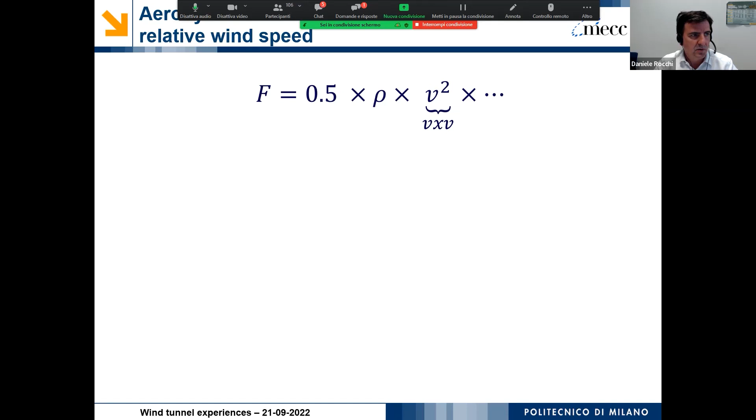This is not only something that for sure we know, but what is interesting is that the relationship between the aerodynamic forces and the relative speed is not a linear dependency. We have the dependence on the square of the relative speed. It means that if we double the wind speed, we make the aerodynamic forces four times larger.

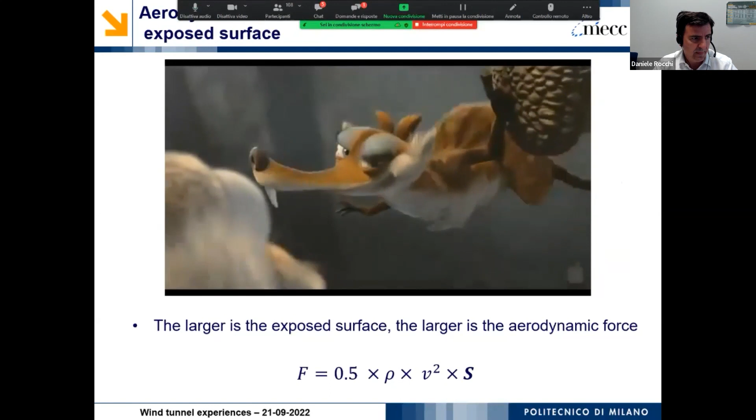Another aspect that is important to understand is that the larger the exposed surface to the wind, the larger the aerodynamic forces. So if we fix this concept, we must say that forces are linearly dependent on the surface exposed to the wind. Then there is another aspect to take into account, due to the shape of the body that is exposed to the wind.

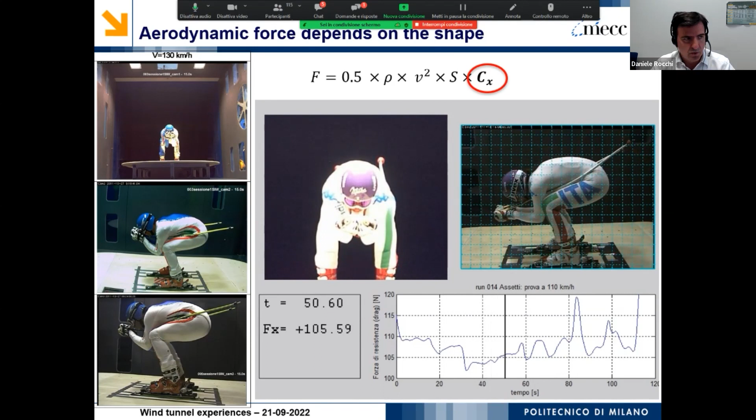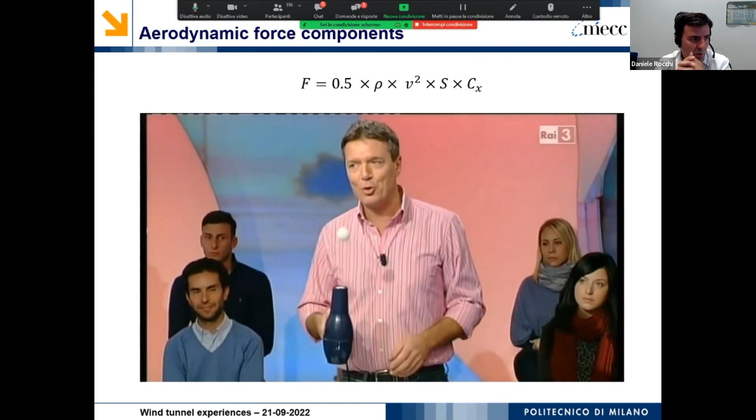And this is inserted in our formula through an aerodynamic coefficient Cx. So if we take the full equation, we can look at this experiment: we have a ping pong ball that is excited by the aerodynamic force coming from an air dryer. And we can see that the ball is in a sort of equilibrium.

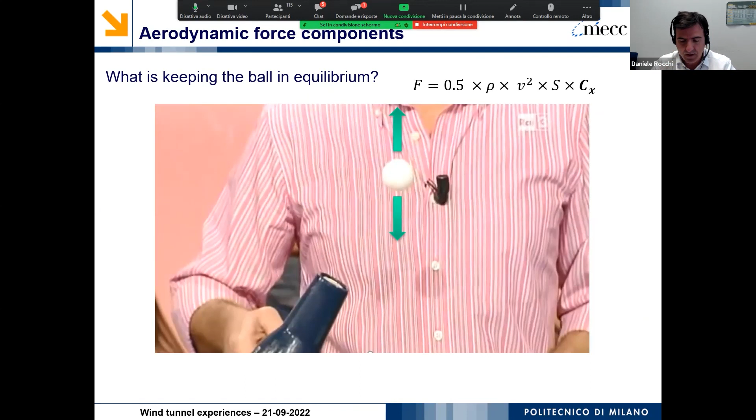This equilibrium is the equilibrium between the weight of the ball and the aerodynamic forces. What is important for our understanding is that the aerodynamic forces can be split into two components. One is the component aligned with the wind direction, and the other is the component perpendicular to the wind direction. The previous one is called the drag force, and the second one is the lift force.

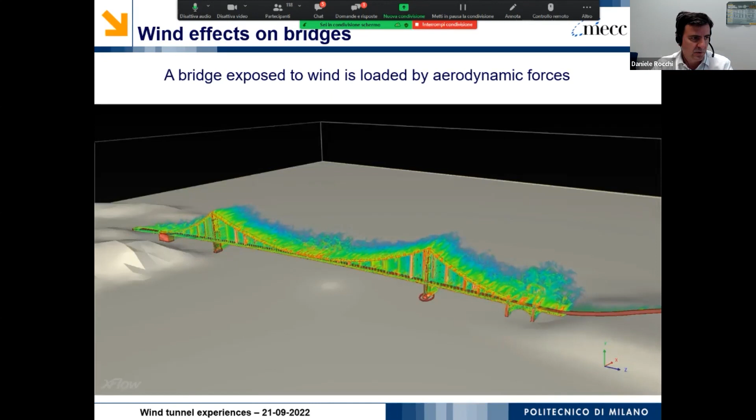So if we move to our topic, a bridge that is exposed to the wind is exposed to this kind of forces. The larger the bridge, the larger are the forces. And if we look at the structure, we can say that the largest surfaces are those of the towers, the main cables, and the deck. But among these three main parts of the structure, the most important one is the deck.

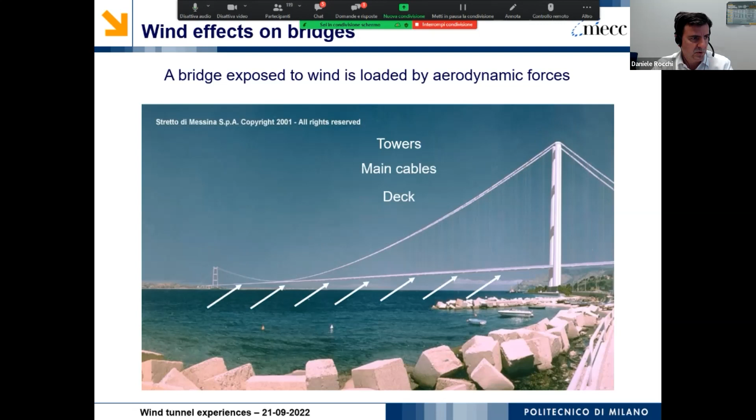And the deck is in the same condition as the ping pong ball. It has its own weight that is supported by the cables of the bridge, and it is exposed to the aerodynamic forces, divided into a lift force and a drag force.

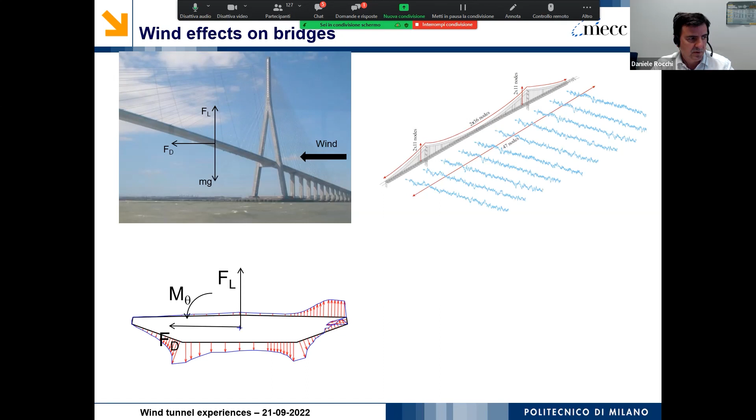If we consider that the bridge is very, very long, we can say that each section of the deck will be exposed to a different wind, but on each part of the deck, the wind will produce a pressure distribution around the deck itself that is responsible for the lift, the drag, and also an overturning moment effect. And these three effects can be described through the equation we already saw in the previous slides.

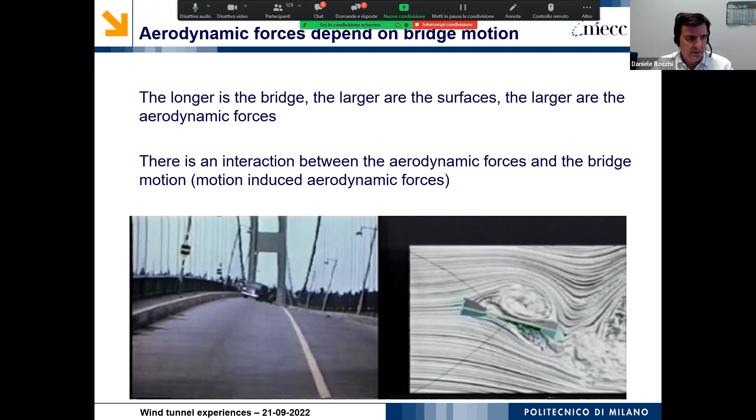So the motion of the bridge is able to change the aerodynamic force. And if this change of the aerodynamic forces is applied in a direction that is able to introduce energy into the system, it will increase the amplitude of the oscillation. And this is what occurred to the Tacoma Bridge.

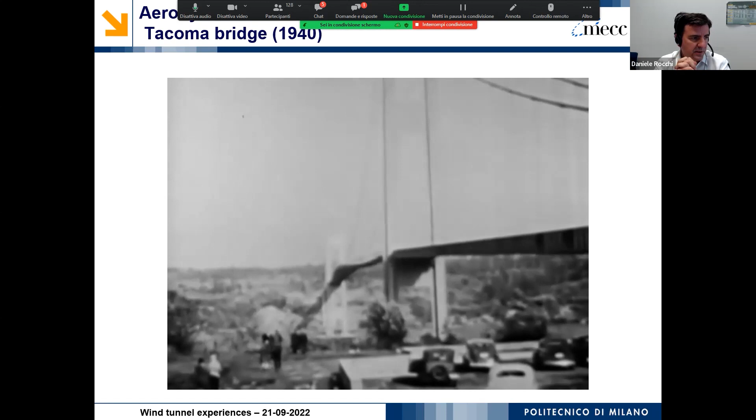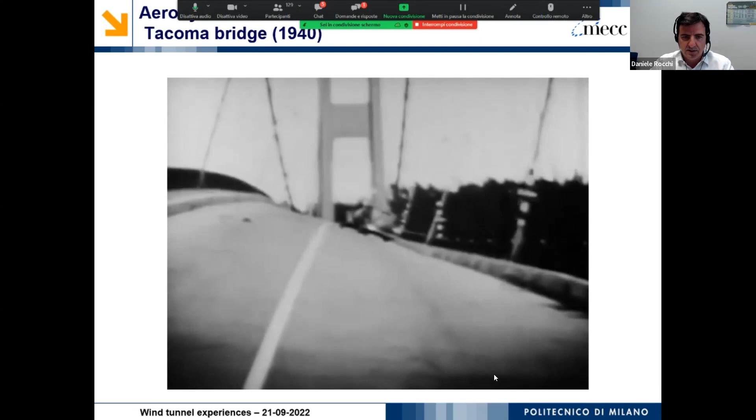In 1940, this bridge was built on a river, and after the completion of the construction stage, there was a windy day that was able to excite the structure with this torsional motion. The explanation of this torsional motion is due to the interaction between the motion of the bridge and the aerodynamic forces.

This was a disaster, since at the very end of the story, the bridge collapsed. And after this failure, in the scientific world a deep investigation was started into what were the causes that produced this catastrophic failure.

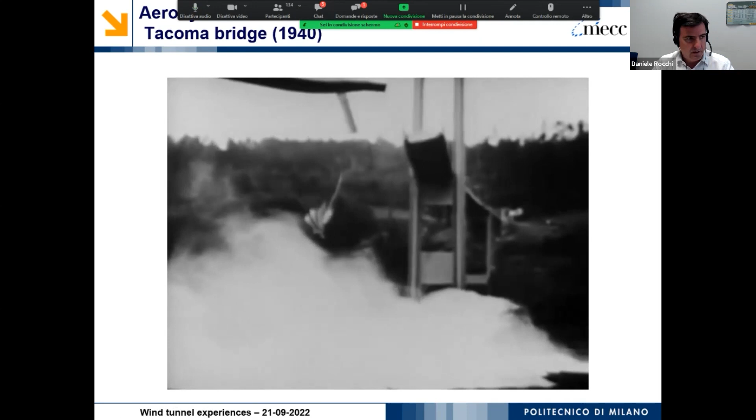The explanation for this failure was, as I said, due to the interaction between the aerodynamic forces and the motion of the deck, and this is due to the bad aerodynamic shape selected to build this bridge. This bridge, showing a very large frontal area, generates aerodynamic forces that act in favor of the motion, and that produces instability. So the solution is to perform an aerodynamic optimization of the shape of the deck, and this can be done in several ways.

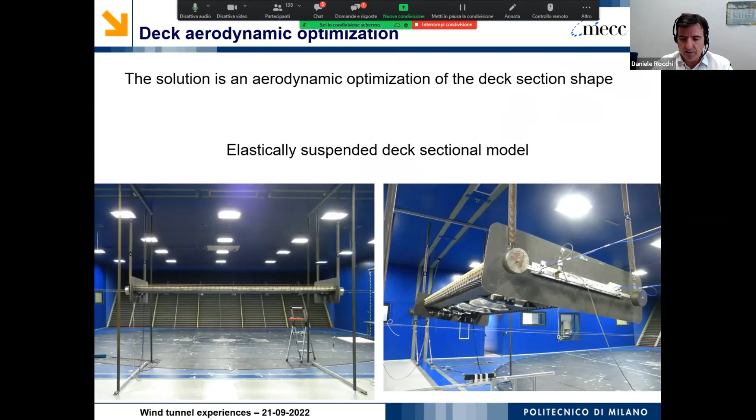One way is using a deck sectional model, a reproduction in the wind tunnel of a small part of the deck, and this small part must behave exactly as the full bridge. If we look at this video, we can see that this deck model is suspended on springs, and you can recognize some lumped mass at the end of the model, in order to reproduce not only the vertical but also the torsional motion of the deck.

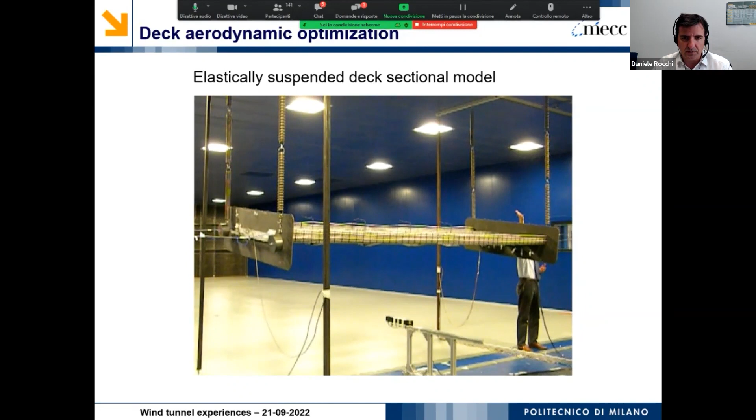And when we switch on the wind in the wind tunnel, we can measure the response of the deck in order to investigate if this motion produces instability or not, and in case of instability, to modify the shape of the deck to remove this kind of instability.

Another result that can drive the optimization of the shape of the deck is the measurement of the aerodynamic forces on the deck sectional model. So many times these deck sectional models are equipped with force balances. In this case, the force balance is inside the model.

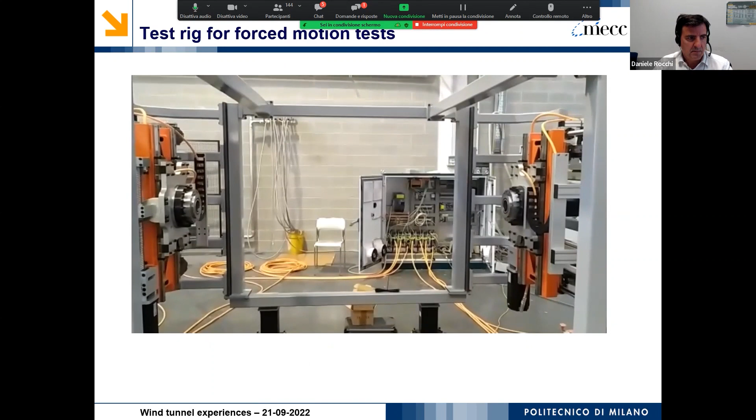This can be done by rotating the model, but we can also investigate the aerodynamic forces by moving the deck sectional model along different axes, so horizontally, vertically, or torsionally. To this purpose, we developed a system with some electric actuators that are able to move the deck sectional model in different directions.

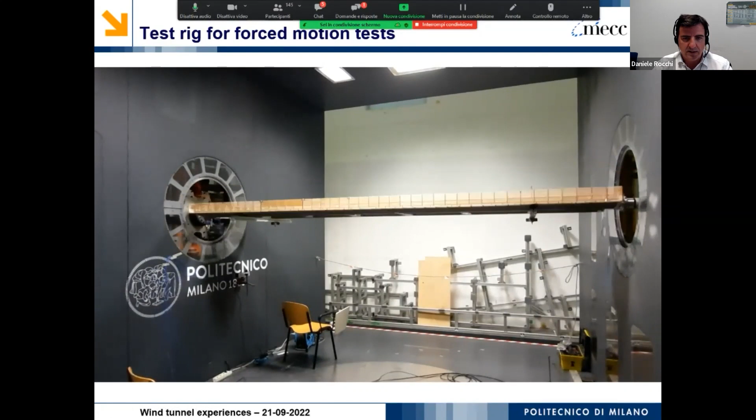So a video of the system with the sectional model is this one. We can reproduce any kind of motion that the deck can have under the wind, investigating if the aerodynamic forces that arise due to this motion are stable or unstable.

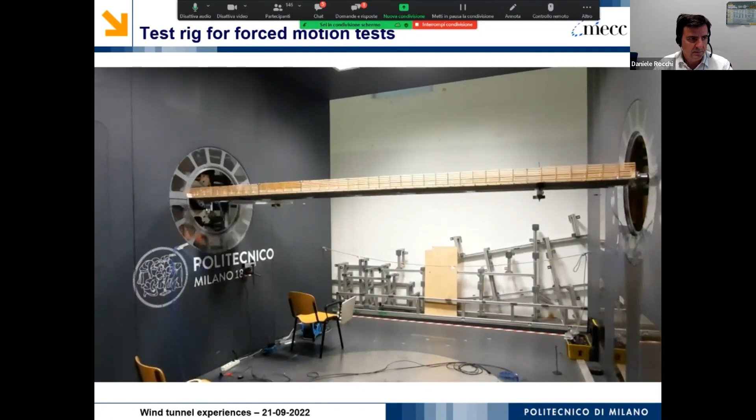And this is the setup in our wind tunnel. All this kind of wind tunnel tests, so the tests on suspended deck sectional models or on sectional models moved by this kind of system, produce the optimized solution.

After the Tacoma Bridge collapse, one of the most popular solutions was a single box, like these three examples taken from three different suspension bridges. In this case, this kind of shape does not have the 1 degree of freedom instability that was the kind of instability of the Tacoma Bridge.

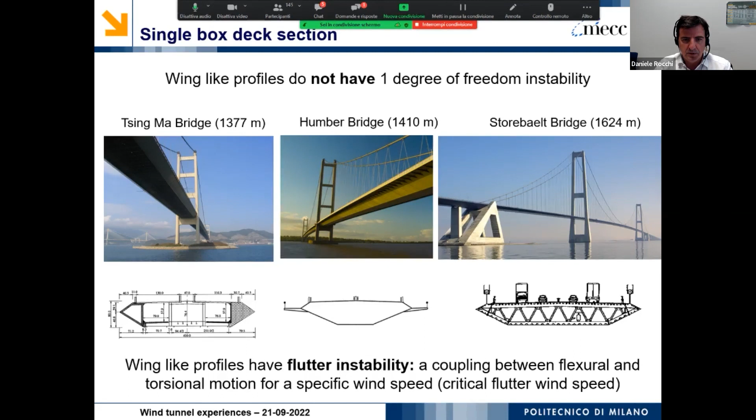But this is not the end of the story, because it was discovered that there is another kind of instability called fluttering instability that also affects this kind of single box deck solution. This fluttering instability is a specific coupling between the vertical and the torsional motion of the deck that, under some critical wind condition at a certain wind speed, produces this kind of instability.

So in this animation, you see that the motion is no longer simply torsional like in the Tacoma Bridge example, but here we have a vertical and a torsional motion that are coupled by the aerodynamic force field. They behave in a way that when the deck is moving upwards, the aerodynamic force is also pointing upwards, and when the deck is moving downwards, the aerodynamic force is also pointing downwards. So aerodynamic forces are always aligned with the motion of the deck.

And so they are very effective in producing large vibration of the bridge, up to reaching a sort of instability that produces the failure of the structure.

So the aim of the wind tunnel test, once we already optimized the shape of the deck, is that we can't avoid having this kind of fluttering instability, but we want the critical wind speed that produces this kind of instability to be so high that it's not probable. In other terms, this critical flutter speed must have a return period that is very, very long.

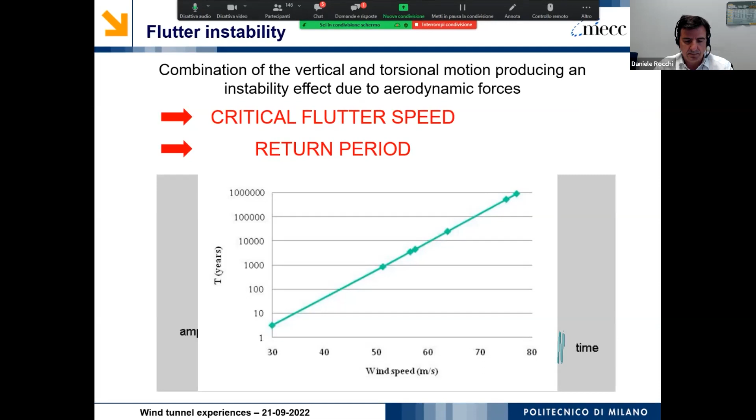This improved research in the bridge and wind engineering field, and other solutions were developed.

In recent years, for very long span bridges, which have more problems with aerodynamic loads, we passed from a single box to a double box. So the deck is composed of 2 separated boxes, or even 3 different boxes. The reason is that if we pass from a single box to a multi-box solution, we reduce the aerodynamic coefficients, and as a consequence, we increase the critical wind speed to very high conditions.

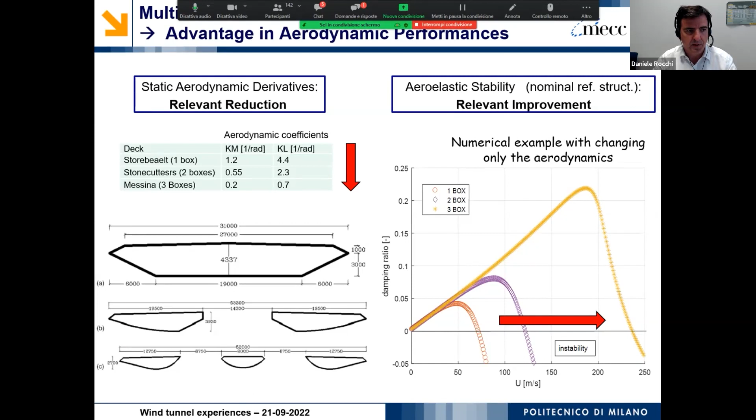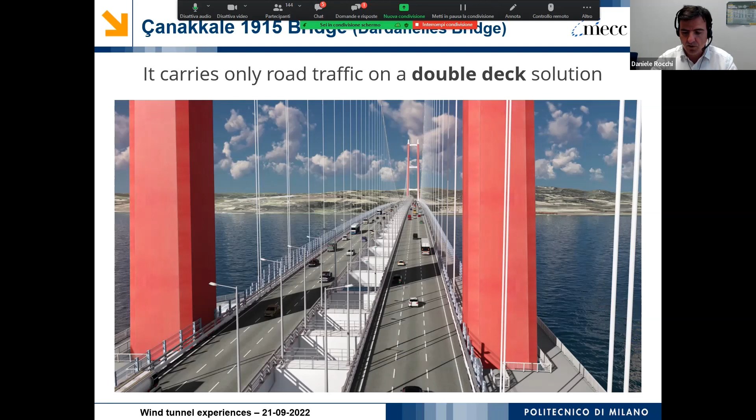This is, for example, the solution adopted for the longest span bridge in the world, the Çanakkale bridge in Turkey. This bridge has a main span longer than 2 kilometers. If we look at the solution of the deck, we can recognize 2 different boxes connected with cross beams, each carrying road vehicles, connected with lateral beams.

This is a solution that we already tested in our wind tunnel, taken from previous studies performed at the Politecnico di Milano on the Messina Bridge. The Messina Bridge was studied to connect Sicily to the mainland. Sicily is an island in the south of Italy. In that case, the main span of the bridge was 3.3 kilometers, and another requirement was that the bridge also had to carry railway traffic, not only road traffic. For that bridge, a 3-box solution was developed.

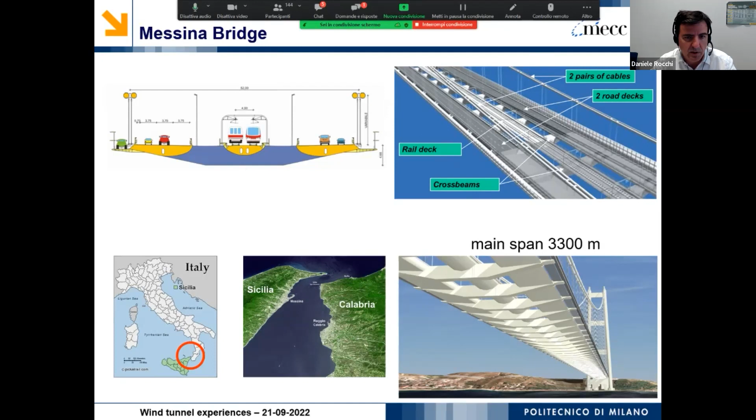In the wind tunnel, we don't only test and optimize deck sectional models, but we also have the possibility to study the full bridge condition. To do that, we usually build what we call an aeroelastic model of the full bridge. An aeroelastic model has the same shape as the real structure, but also the same dynamic behavior of the real structure.

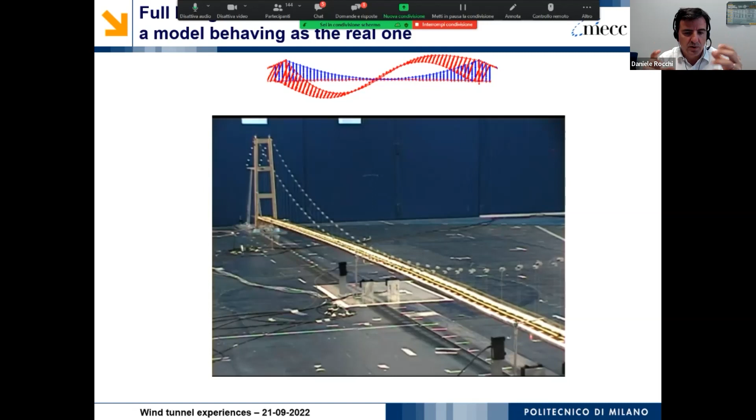The reason for this kind of test is to investigate the behavior not only of the deck, which even though it is the most important aerodynamic part of the bridge is not representative of the full bridge, but the behavior of the whole structure. In this video, this kind of aeroelastic model is able to highlight the real behavior of the structure when exposed to the wind. Here, the wind is highlighted with smoke, a typical technique to show the flow in the wind tunnel, and you see the motion of the deck.

Of course, if the aeroelastic model is properly designed, it is also able to reproduce what we call the flutter instability. In this video, we see an increase in the amplitude of the motion that becomes uncontrolled, up to the failure of the structure.

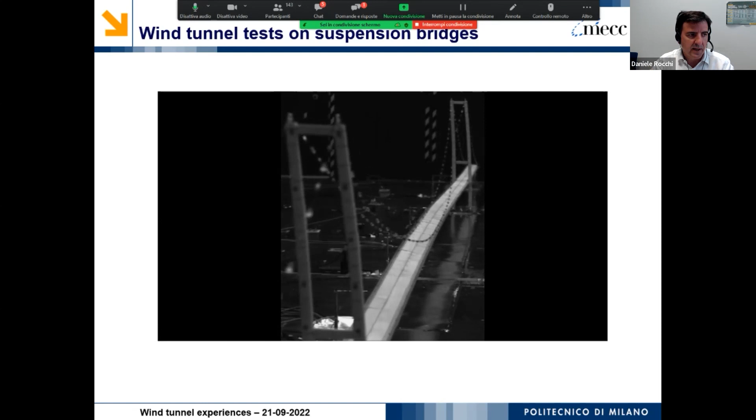So we can really investigate the limit of the aerodynamic stability of the structure itself, and demonstrate that this wind speed is far above the wind speed with the return period selected to design this kind of structure.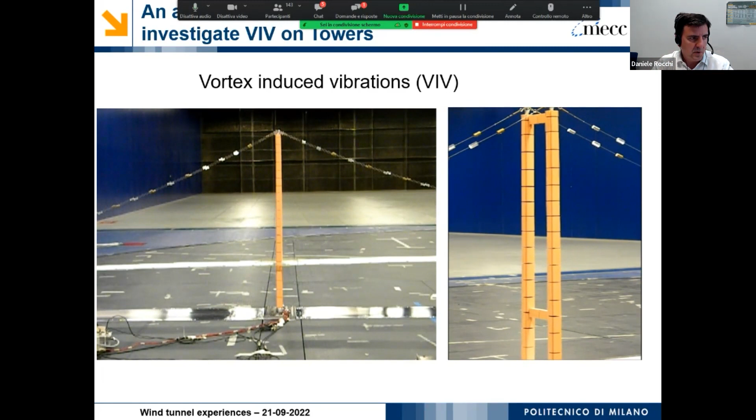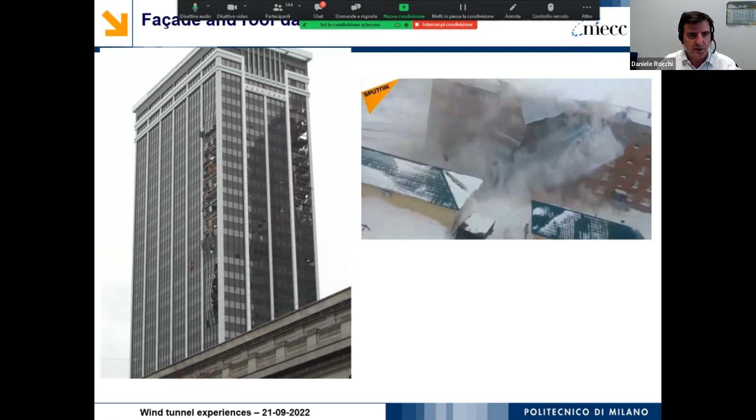Let's move on to the second topic, wind effect on tall buildings. There are several effects that can occur on tall buildings. One is the detachment of some part of the facade, and, for example, the roof, which are the regions where we have the larger aerodynamic loads. In order to study this, we needed to investigate what is the pressure distribution around the envelope of the building.

The models used to do that are rigid models, as you see on top as an example. A rigid model is different from the elastic model we saw on bridges, because it is not intended to reproduce the dynamic behavior of the structure, but only the shape of the building. This is because the dynamic response of a tall building is smaller than that of a suspension bridge. So the motion is smaller, and only very tall buildings can have an important effect due to motion on the aerodynamic forces. Most buildings have a small dynamic response, so it is enough to reproduce the shape of the building to measure the pressure distribution around the structure.

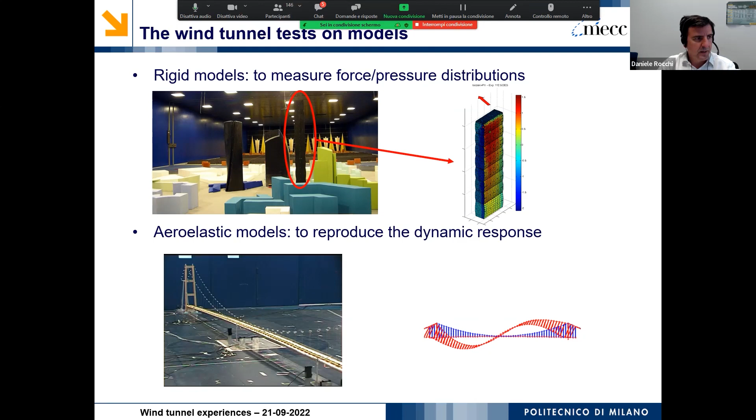There is a new thing we have to take into account: unlike a bridge that develops horizontally, a tall building develops in the vertical direction. The wind has some variation in the vertical direction because it interacts with the ground of the earth. On the earth we have a lot of roughness produced by trees, buildings, and all the obstacles on the surface of the earth, so there is a reduction of wind speed very close to the ground. This reduction is less effective if we move far away from the ground.

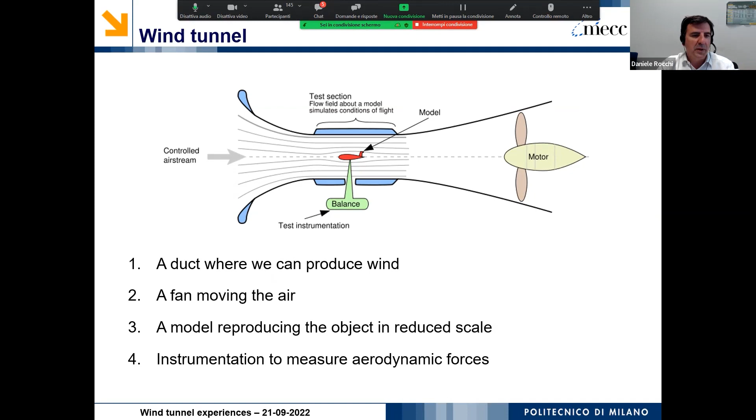The idea is to put a model inside a flow in the wind tunnel. The wind tunnel is a duct where we can produce wind using fans to move air, and there is a model that reproduces the shape of the object we want to test, instrumented to measure pressures or aerodynamic forces. At Politecnico di Milano we have two different ducts, two different test sections in the same wind tunnel. We have fans that move air, initially driven to the second floor, where we have the atmospheric boundary layer test section, which can reproduce a wind similar to what we have in the atmospheric boundary layer in real life.

In order to produce the correct characteristics of the wind before it exerts aerodynamic loads on the model, we need a lot of space. After the test on the model, the flow is bended again to the first floor, where we have another test section to test objects that do not require the presence of an atmospheric boundary layer.

This is an overview of the dimension of the atmospheric boundary layer test section. We need 36 meters in order to develop the wind with the proper characteristics. The maximum wind speed in this section is 15 meters per second, and we have a turning table used to change the exposure of the building to the wind, because the wind is fixed, so we cannot change its direction. We change the exposure of the object instead.

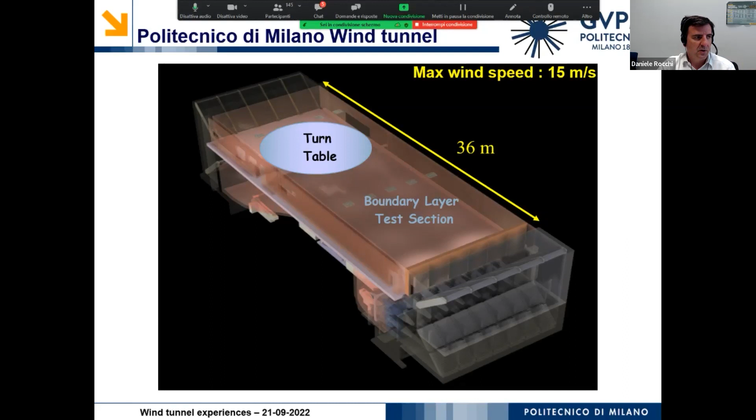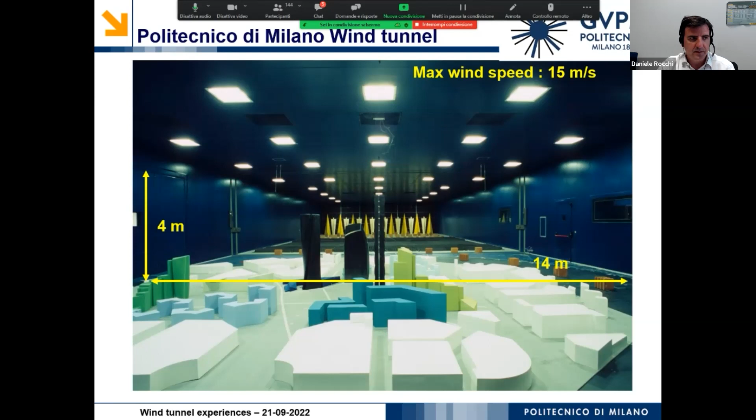This is our test section, 14 meters wide and 4 meters high, in order to host the rigid models of the buildings. The other test section is different, where the maximum wind speed can be 50 meters per second. It's smaller because we need to increase the wind speed, so we need to reduce the section of the testing area, which is 4 meters wide and 4 meters high. In this section we can, for example, test the sectional model of bridges.

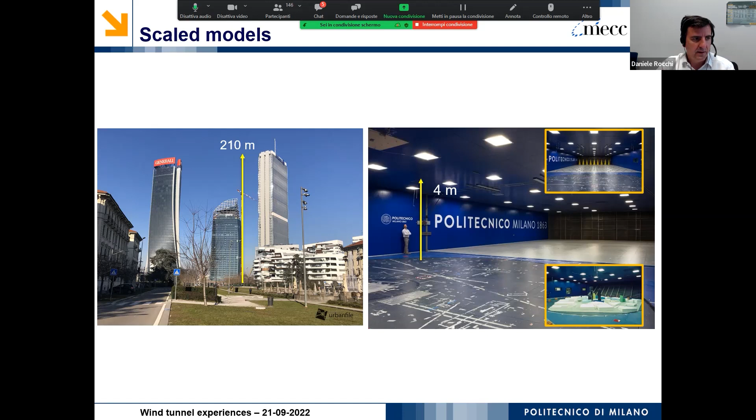This very large facility is needed because, for example, a tall building that is 200 meters high needs to be scaled down to fit the 4 meter height of the wind tunnel. For this application, we choose a scale factor of 1 to 100. To host a full bridge of 2.6 kilometers in the 14 meter horizontal dimension of the atmospheric boundary layer test section, we need to use a 1 to 200 geometrical scale.

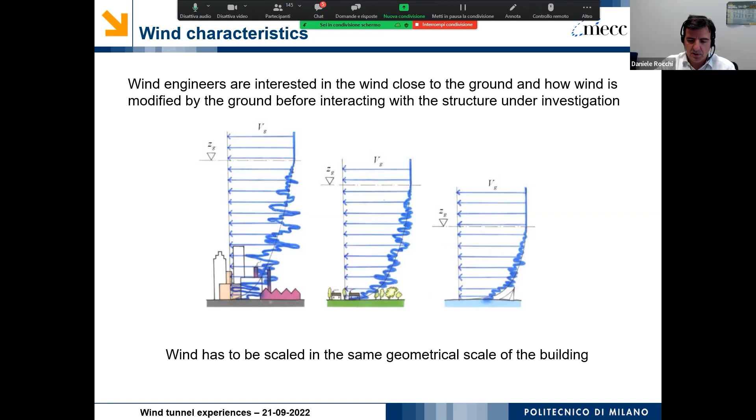How can we obtain a wind that is similar to the full scale one? As we can see from this comparison, if we are in different positions on Earth, such as over the sea or in an urban environment, the profile is different, and the atmospheric boundary layer has different characteristics. These characteristics are connected to the obstacles on the Earth that produce this effect. So the idea is to behave exactly as nature does.

By putting some obstacles in the flow and some roughness on the floor, we are able to obtain, in the position where we place the model we want to investigate, a flow that has similar characteristics to the real one. Of course, if the model is a mall positioned in an urban area where there are already buildings built, we need to also reproduce the proximity models, all the buildings surrounding our building, in order to have the same effect we have at full scale.

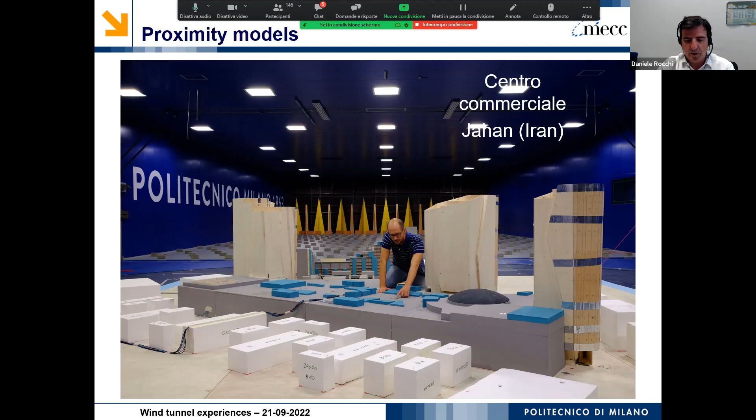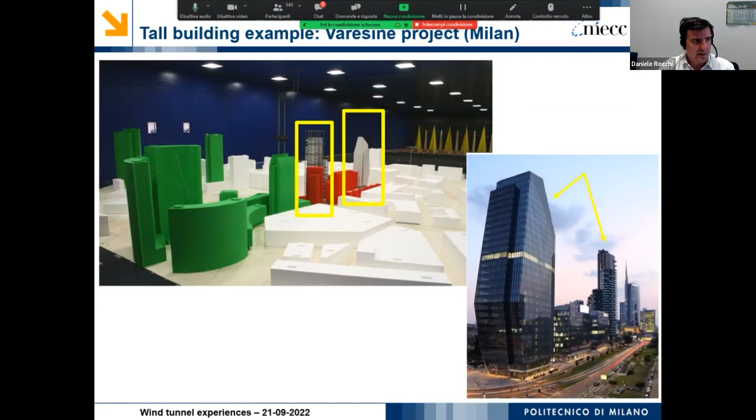Coming back to our problem of measuring the pressure distribution around the building, in this example you see a building, or two buildings, in their environmental urban area. Each of these buildings is equipped with some pressure taps. Pressure taps are holes drilled on the surface of the building model and connected with tubes to an instrument that is able to measure the pressure on the surface.

For example, for this building we have 256 positions where we can measure the pressure. The result is that we can plot the results for each position where we have a pressure tap, and investigate if there are problems in some part of the building facade.

In this case, the most dangerous condition is in the parts shown in dark blue, because dark blue means negative pressure. Negative pressure is suction that can detach the glasses from the facade or the roof of the building. We test this rigid model by changing the exposure, that is, the direction of the wind, and we can select the worst conditions where we measure the most negative pressure in some part of the facade. This value is used to dimension the fastening system of the facade.

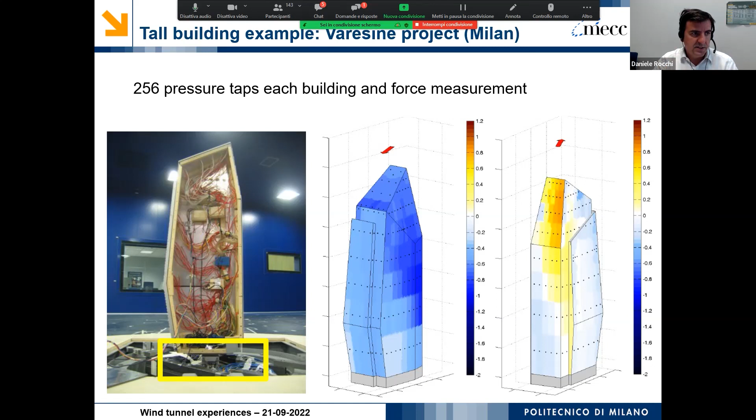This is not the only problem of tall buildings. Tall buildings also have the problem of vortex shedding, which occurs when wind interacts with the shape of the building. Looking at this animation, we can see that an obstacle with a square shape is able to produce vortices in the wake.

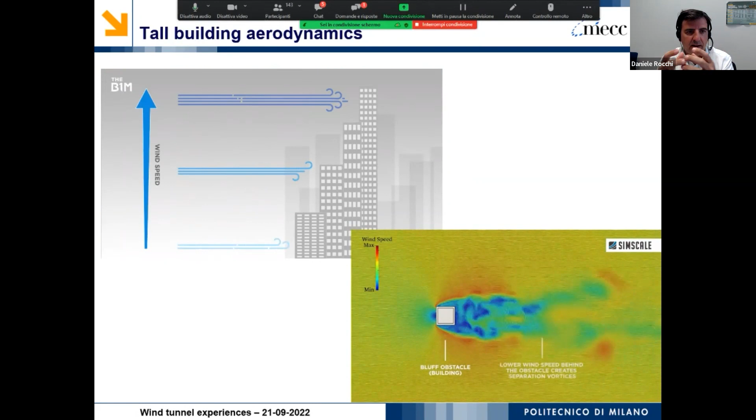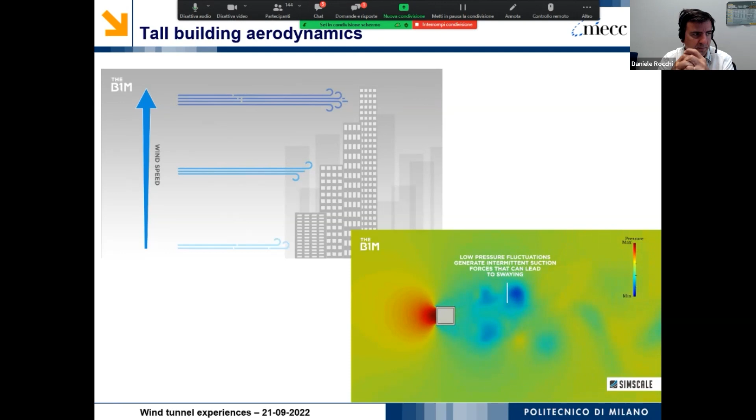These vortices in the wake, while detaching from the building, produce aerodynamic forces on the building itself. If we change the shape of the building, we change the fluid dynamic mechanism of this vortex shedding phenomenon. This phenomenon can produce motion of the tall building, because the force produced by vortex shedding is a periodic force with a specific frequency that, if equal to one of the natural frequencies of the building, can produce a resonance effect.

To study this problem, you can use, for example, an elastic model similar to the model described for bridges. In this case, an elastic model of the supporting frame of the Dubai Eye highlights possible problems of vortex shedding on this kind of structure.

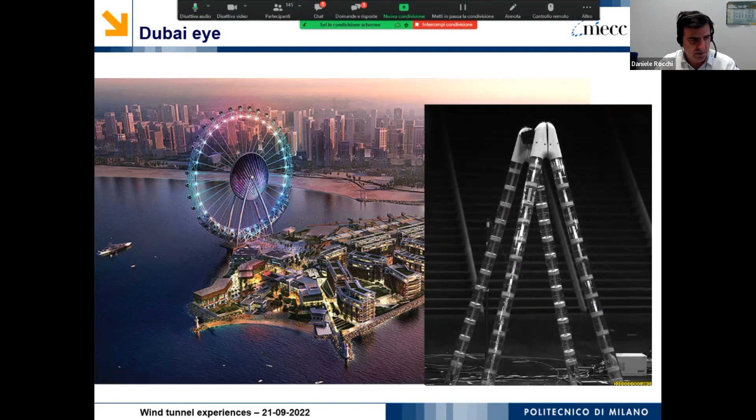What is the solution to avoid vortex shedding from a tall building and the vibration induced by it? There are different solutions. Most are aerodynamic solutions, and there are also some structural solutions.

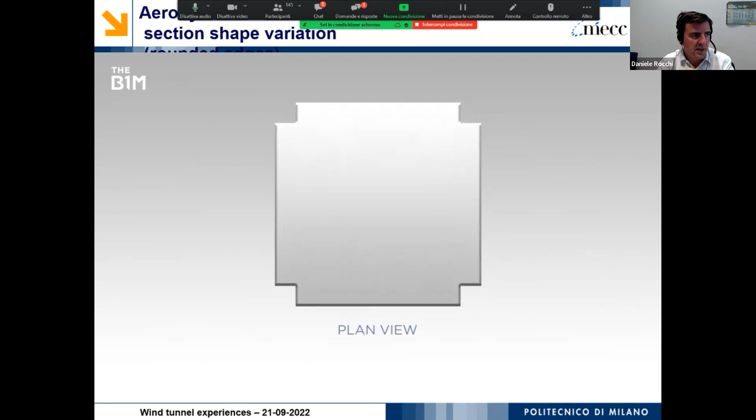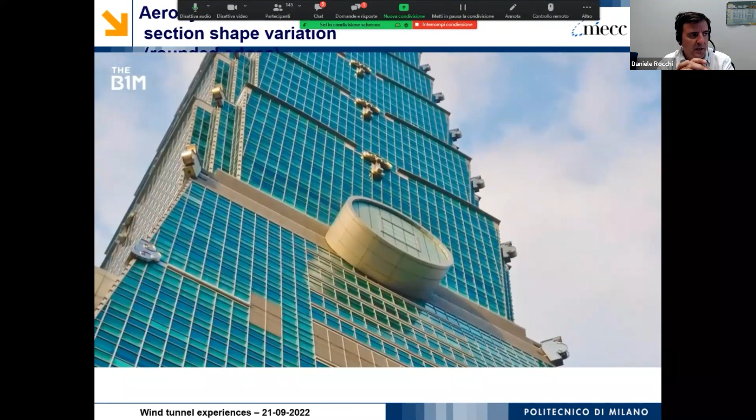Among the aerodynamic solutions, one is to change the shape along the height of the building. If the shape is irregular, vortex shedding is less likely to occur. If we pass from a square with sharp edges to a square with rounded or cut edges, we can reduce the vortex shedding phenomenon, especially if we change this shape with the height of the building, because the global effect on the whole building is less coherent moving from the ground to the top.

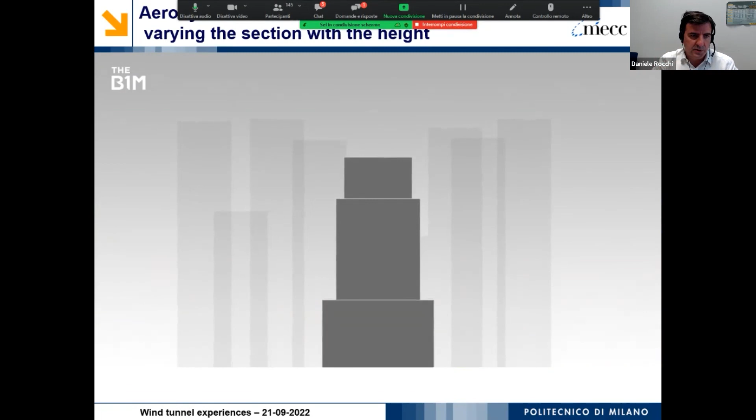Another solution is to continuously change the shape of the building. Some buildings exploit this solution to reduce vibration. Of course, vibration of the building can lead to comfort problems for the people working inside.

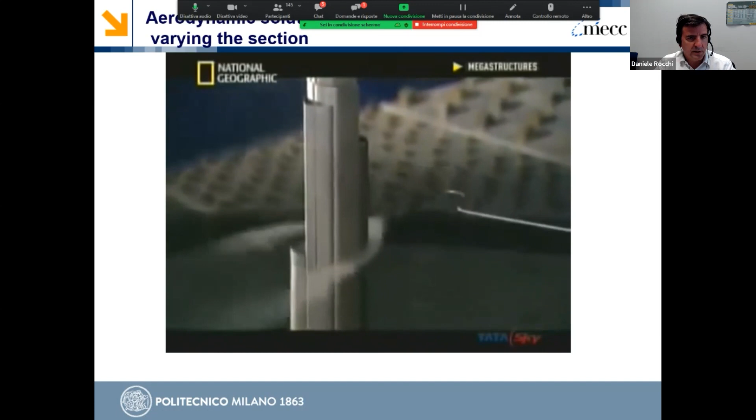These solutions are tested in the wind tunnel. For example, this solution is taken from the tallest building in the world, built in Dubai. You can see that this model is tapered, reducing the area of the floor moving away from the ground, and also changing the shape.

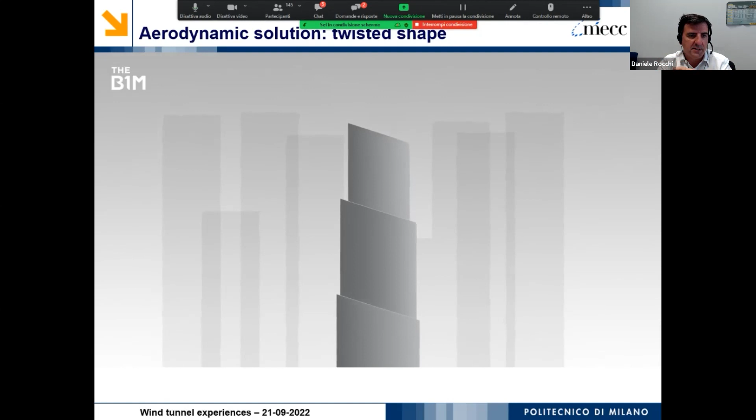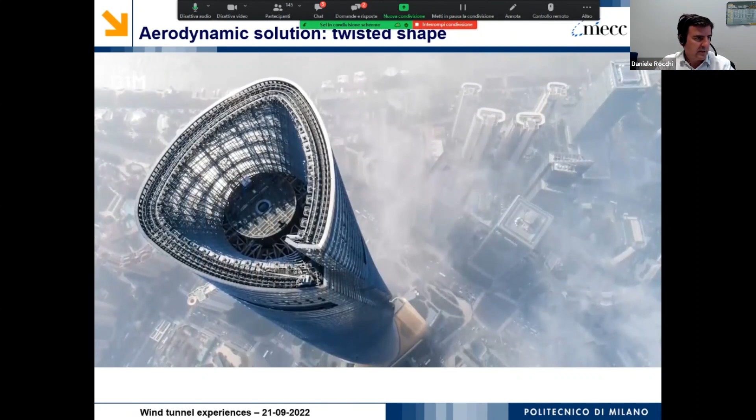Another possible solution found in some already realized buildings is to use the same shape but twist it moving away from the ground. The building at each floor has a similar shape, but rotated around the vertical axis. We have another example here in Milano: the building on the left has a similar shape but with this twisted architecture.

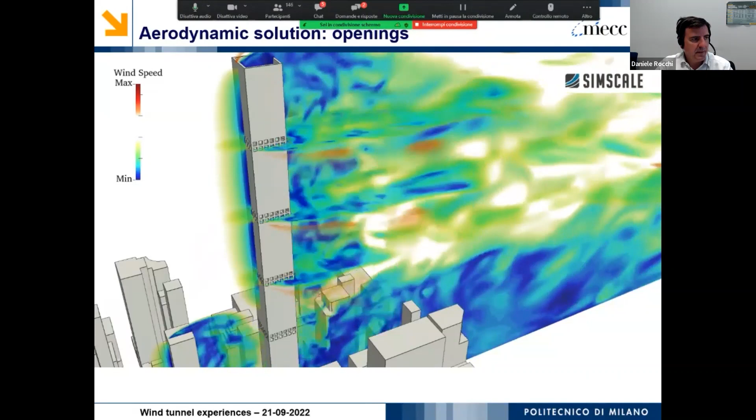I think the most interesting and recent solution is this one: a very slender and tall building recently built in New York. The solution adopted to build such a slender and regular-shaped building is to leave some floors completely empty, providing voids where the wind can blow inside, so the global behavior is not coherent along the total height of the building but has variation at some floors, which reduces the effect.

Apart from these aerodynamic solutions, there are structural solutions called tuned mass dampers. What are tuned mass dampers? They are systems designed to increase the damping of the structure, consisting of big masses connected to the structure that are able to move. The motion of this large mass, connected to specific dampers, is able to remove energy from the system to damp the motion of the building, achieving comfort criteria.

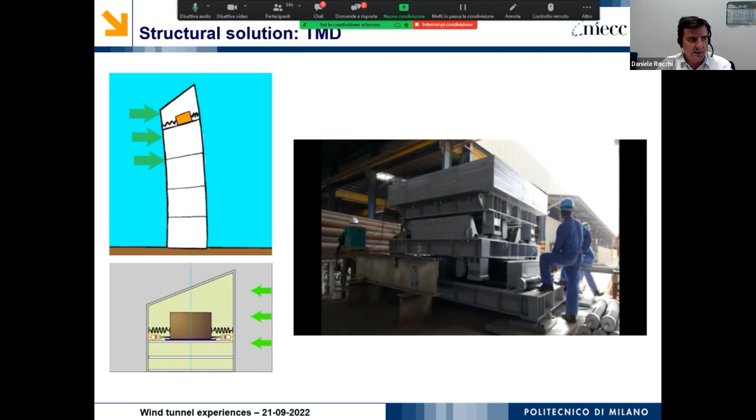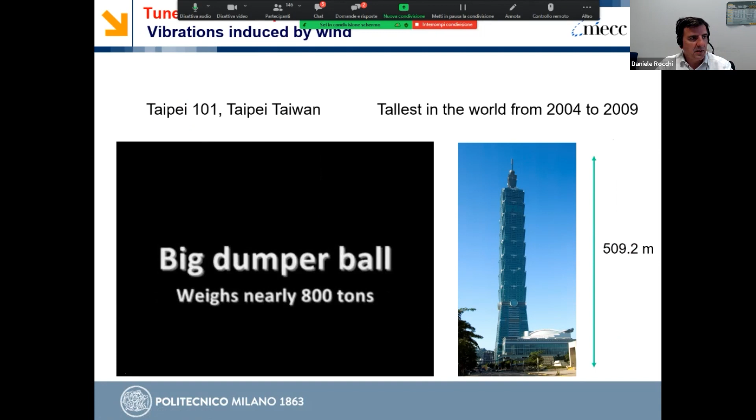I think the most famous tuned mass damper is the one adopted in the Taipei 101 building, which was the tallest building in the world from 2004 to 2009. This TMD is a big ball, a pendulum: the mass is organized like a sphere, and its connection to the building is through dampers visible at the bottom.

This TMD is visible from the restaurant on top of this building, and on a windy day you can see that the tall building is more or less still while this big ball moves, destroying some of the energy introduced by the wind into the building.

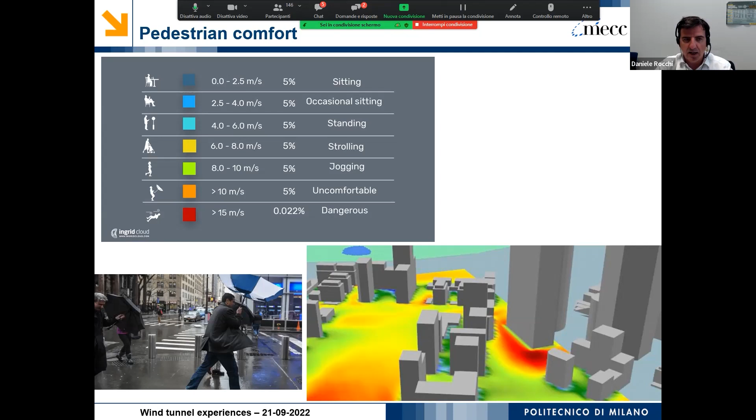Just for mentioning other problems related to wind and tall buildings, one is pedestrian comfort. When you insert tall buildings in an urban environment, you modify the situation in that part of the city, and you can produce speed-up effects that are not comfortable for people living there. Depending on the activity people are doing—sitting at a restaurant, standing, or jogging—there are different thresholds of comfort. So one study usually done using wind tunnel tests is to measure the flow at pedestrian level to understand if the new building produces an uncomfortable situation.

Okay, before moving to the last topic, I think it's a good time to see if there are some questions on this one. Yes, Professor Rocchi, we have some questions—two questions here for this topic.

The first one is: what is the percentage of error acceptable in wind tunnel tests to have results as close as possible to reality? I think you are muted, Bru. Okay, can you hear me now?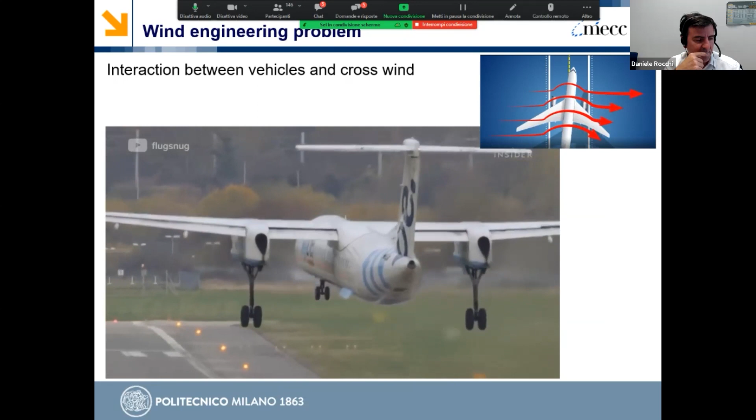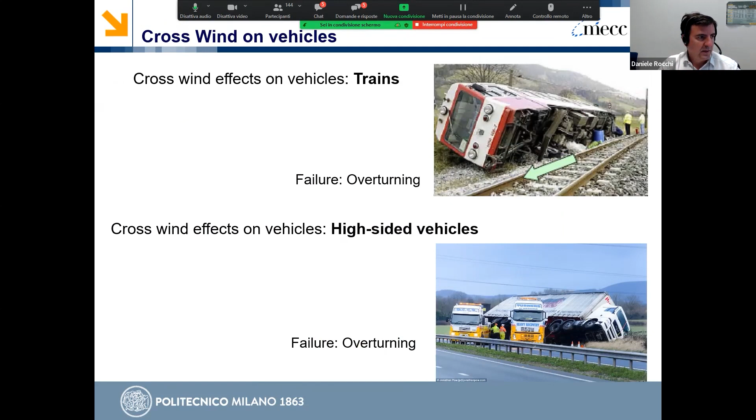The most important effect in the interaction between wind and vehicles is the crosswind. This is very well known in the aircraft field - strong winds cause problems in landing. It's also well known for road vehicles and railway vehicles. The most risky effect on a railway vehicle is the overturning of the vehicle produced by lateral wind. We have had some accidents concerning the crosswind effect on vehicles.

But we have these problems also here in Europe. For example, in this video in Switzerland, on a windy day in winter, you see the overturning of a vehicle produced by lateral wind.

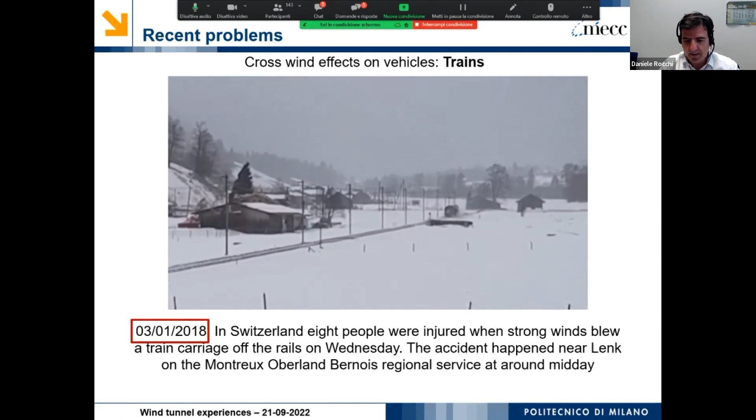I think these effects will be more frequent in the future, because of climatic changes that can produce very strong wind more frequently than in the past. This is, for example, a storm in the UK in 2022, and here you see the overturning of a lorry on the road.

So in order to study this problem, we need to understand what is happening. The presence of a lateral wind modifies the aerodynamic behavior of the train. We have to sum the running speed of the train with the wind speed of the crosswind - a composition of two velocities, one the train velocity and the other the wind velocity, which are not aligned but more or less perpendicular. So the final, relative wind that we saw at the beginning is responsible for the aerodynamic forces acting on the vehicle with a skewed angle.

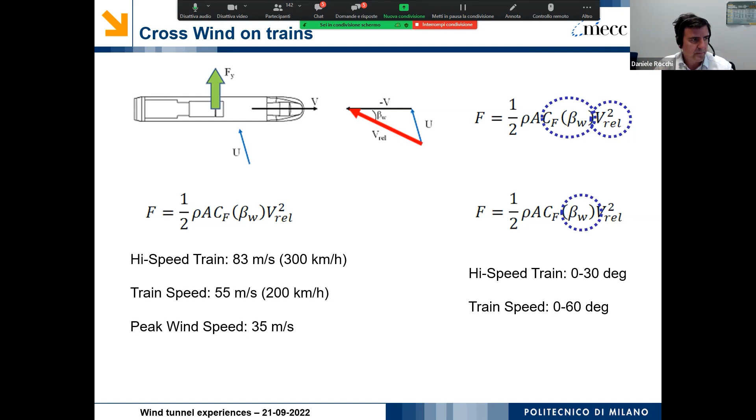The final aim of this study is to understand if there is a risk of overturning and to study what are mitigations of the risk. So the basic idea is, if we find out that the risk is too high, we need to decide what mitigation solutions we want to apply.

For the railway system, we have two possible solutions. One is to put wind barriers on the side of the railway line in order to reduce the wind acting on the passing vehicle. The other possibility is to reduce the speed of the train when it enters areas where the risk of overturning due to crosswind is too high.

Since trains are connected to a system that can control train speed, if you measure what the windy conditions are in the region and decide they are too risky, you can, for example, reduce the speed of the train in order to reduce the aerodynamic forces.

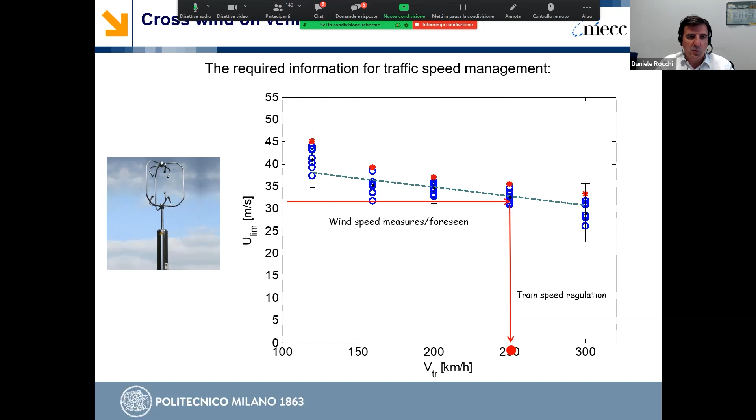If I have this information, I can perform a meteo analysis of the railway line, find out what are the most risky, most windy parts of the line, and decide if we want to protect it with wind barriers or reduce the train speed in that area.

To obtain this kind of information, there is a methodology developed in recent years that starts from aerodynamic coefficients measured in the wind tunnel. The contribution of the wind tunnel is in defining the aerodynamic coefficients used in the methodology to compute the aerodynamic loads, and to perform a dynamic simulation of the train, introducing into the dynamics the effect of these aerodynamic loads.

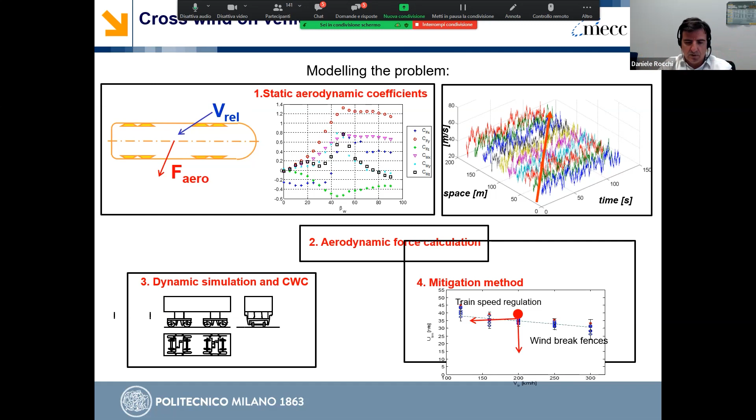Looking at the results of this numerical simulation, we can find out what combinations of crosswind speed and vehicle speed produce critical conditions. One consideration is that the aerodynamic loads that want to overturn the vehicle are counterbalanced by the weight of the vehicle itself, which acts as a restoring effect.

Traditional trains had a composition where most of the weight was at the end cars, where locomotives were positioned - so usually the heaviest cars were the end cars because they were locomotives. Nowadays, new trains have a different architecture: all the cars in the composition carry passengers, and even the first and end cars are passenger cars.

The traction power is now distributed in different cars along the train. I'm discussing this because usually the two cars of the train most sensitive to crosswind effect are the end cars - the intermediate cars have better aerodynamic coefficients than the end cars. If we remove weight from the end cars because they are no longer locomotives but passenger vehicles, and distribute the weight along the train, it means new trains are much more vulnerable to crosswind effect than previous ones.

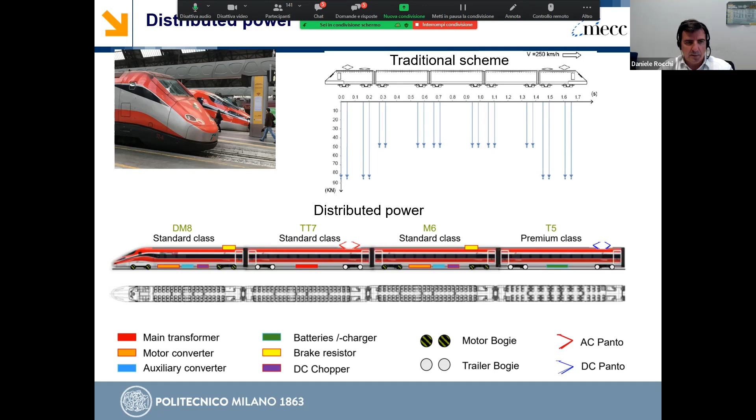The model is positioned on a turning table in order to change the exposure to the wind, and for each different exposure, the aerodynamic forces and coefficients are measured.

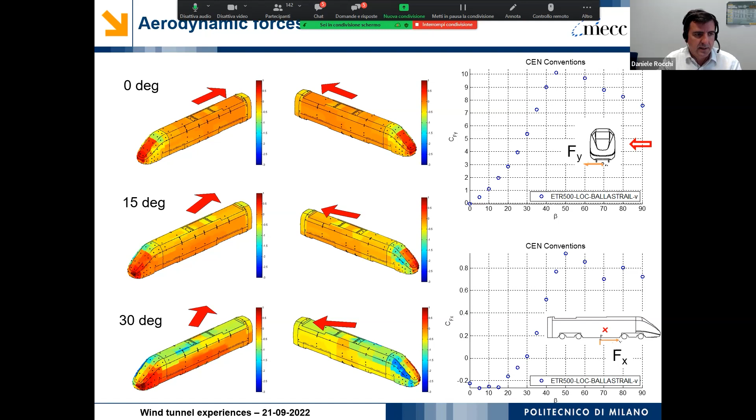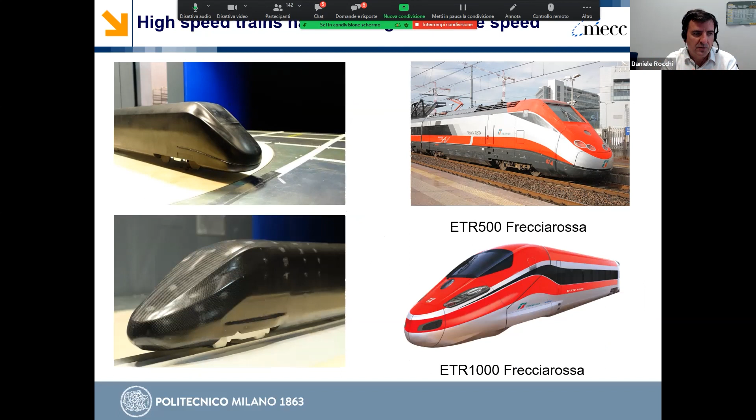Of course, the shape and geometry of the train is important in the definition of this aerodynamic coefficient. If you look at high-speed trains, the shape is very smooth, and it's optimized also for crosswind effect.

But if we compare high-speed trains with conventional trains, the situation is not so different. It's true that for high-speed trains, the relative wind speed is larger because trains are faster. But conventional trains have a bad aerodynamic coefficient, bad in two ways: since the shape is not so optimized from an aerodynamic point of view, the coefficients are larger.

But the train is slower, so the crosswind occurs at a larger angle of attack, a larger value of beta. And we saw before that the coefficient for a larger value of beta is larger again. So it's true that a conventional train has a smaller relative velocity, but this effect is compensated by the increase in the aerodynamic coefficient.

If we look at this plot, we have the limit condition for a high-speed train, the green line, and for a conventional train. We can see that the overturning risk is very similar. So a wind speed of 25 meters per second is critical for a high-speed train running at 300 kilometers per hour, as well as for a conventional train running at 200 kilometers per hour. The same crosswind speed is critical for both trains.

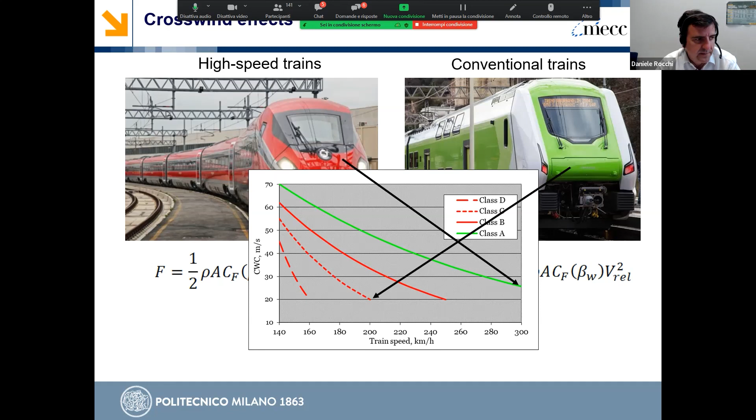What we discussed up to now are crosswind conditions considered as steady state, where the train is running in its direction and is always exposed to the wind. There is another risky condition: when we pass from a situation where the train is protected from crosswind, for example inside a tunnel, to a condition where the train is fully exposed to the crosswind effect, so when the train is exiting the tunnel.

For this kind of analysis, we can also perform a dynamic test in the wind tunnel, different from what we saw before where the train model is still. In that case, it's the transient situation that is dangerous.